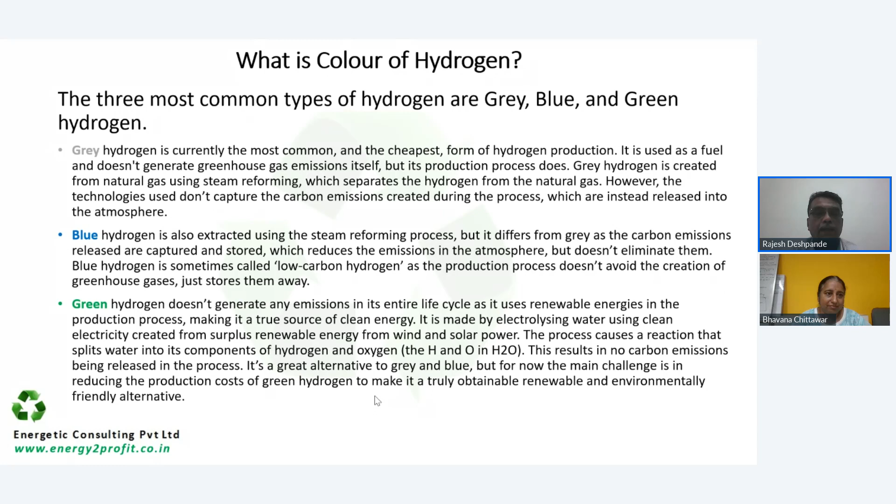Color coding has become necessary primarily because the use of hydrogen for various applications can be promoted only if it is coming out of a sustainable source. Otherwise, it makes no sense to have fossil fuel or electricity generated from fossil fuel and use hydrogen as a transportation fuel or any other source of fuel. So the first challenge was to make sure that the hydrogen coming out in the market is coming from a green source, which is a renewable energy source.

The other variants of color, as the technology is developing, these colors are getting developed. The last of the lot is white hydrogen, which comes out of a process called fracking. In the US, most natural gas is available from fracking, which comes from rocks underneath the ground. It's a kind of geothermal process which converts fossil fuels into hydrogen or a mix of other fuels. This is not very popular, but all the other sources of hydrogen with other colors are quite popular.

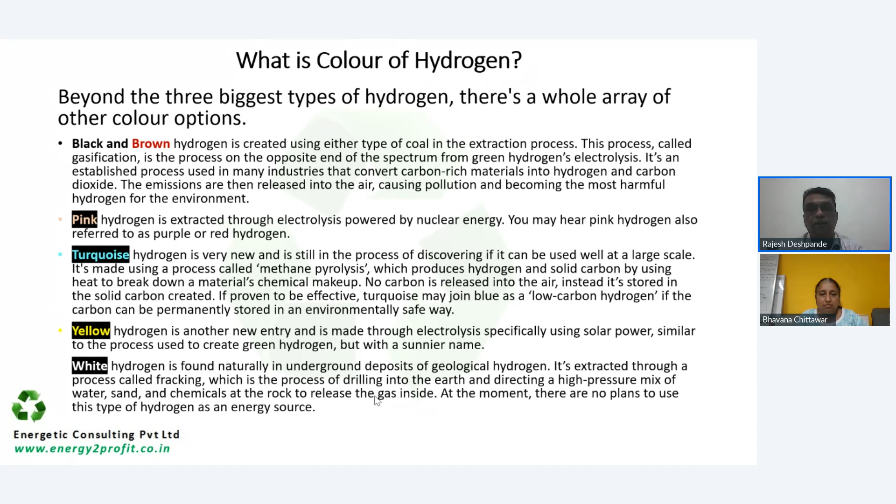Now, let's come to the Indian scenario of the green hydrogen definition under the National Green Hydrogen Mission. This is very latest, August 2023, this has been declared.

This understands that green hydrogen shall mean hydrogen produced using renewable energy, which is like the definition world over, including but not limited to production through electrolysis or conversion of biomass. Now, this is a very important part. This conversion of biomass is otherwise not recognized as a green source of hydrogen as of now in the rest of the world.

Now, in India we are recognizing it, and the renewable energy also now includes such energy generated from renewable sources which is stored, etc. This definition helps us to work on waste to produce green hydrogen.

I will show subsequently why this is a very significant and important step for the country as a whole, because as a country we have a dream to go for decentralized hydrogen generation. We don't want to have hydrogen generation at one place and continue to transport it all over the country. So with this decentralized hydrogen generation, we can now look at all sources including biogas, biomass, municipal waste, industrial waste, and convert them into hydrogen and further chemicals which can come out of hydrogen.

And they are getting color coded now. So for example, we now have green ammonia, which is a source for fertilizer making, coming out of green hydrogen, which comes from the process defined here. And for renewable energy, the hydrogen from waste, including wastewater through the microbial route etc., has to come out of a process with 2 kgs of carbon dioxide equivalent per kg of hydrogen GHG emission.

Now, this is a very good step the government has introduced, whereby we have started to define what exactly we want and how we want it to happen. We have a typical SOEC electrolyzer, that's a technology. Electricity coming from non-biogenic GHG emissions, lesser than 50 grams per electrical unit, needs to be used, but it is not restricting us to use these.

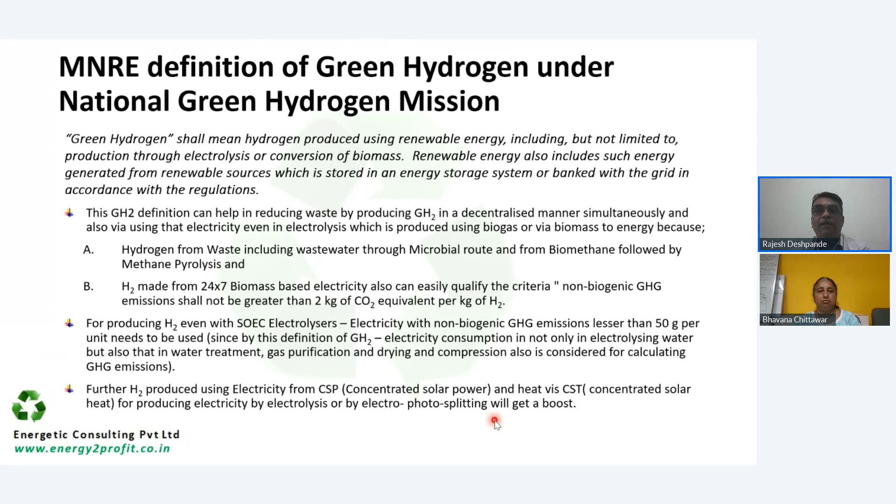Internationally, as I said earlier, the color of hydrogen coming out of biomass is yet not defined. It should include it, but it is not including it today. So, a reasonably proven technology of gasification, which is commercially available, is not possible to use to generate green hydrogen on an international scale. But within India, as I said, in this definition of MNRE, we have given a clear roadmap that we accept this as a green hydrogen source.

Now, without this introduction, the cost of hydrogen cannot be brought down in the capex and opex model. I will show this in the subsequent slides. So, the moment we go to this route of biomass, MSW, gasification route, then it can fulfill India's dream of decentralized hydrogen generation at the point of use.

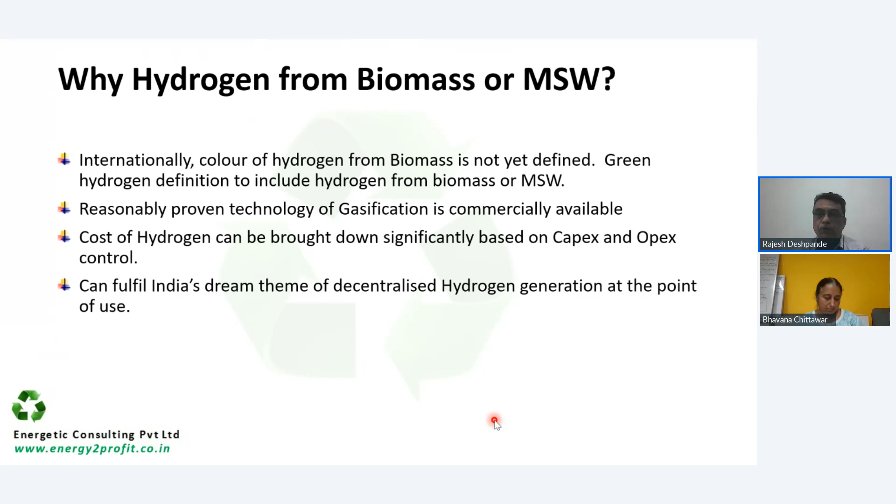When I'm talking about point of use, what are those touch points where hydrogen can be used as a fuel? One of the prominent and very direct uses is as light and heavy vehicle fuel. Hydrogen itself can be used as a fuel, and now we have hydrogen fuel driven cars available commercially.

Also, hydrogen can be converted to fuels like dimethyl ether, ethanol or methanol, which can be blended in current gasoline or petrol to generate hydrogen-rich gasoline, petrol, or diesel, which can substitute partially or fully the dependency on fossil fuel.

Fuel cells can become a future substitute to DG sets, particularly for cell towers like mobile cell towers, and at remote construction sites it is being immediately tried. Reliance Jio has done good work on this front, and they are moving ahead with a massive program on fuel cell to electricity for their cell sites. One day it can come to the kitchen and substitute LPG or PNG.

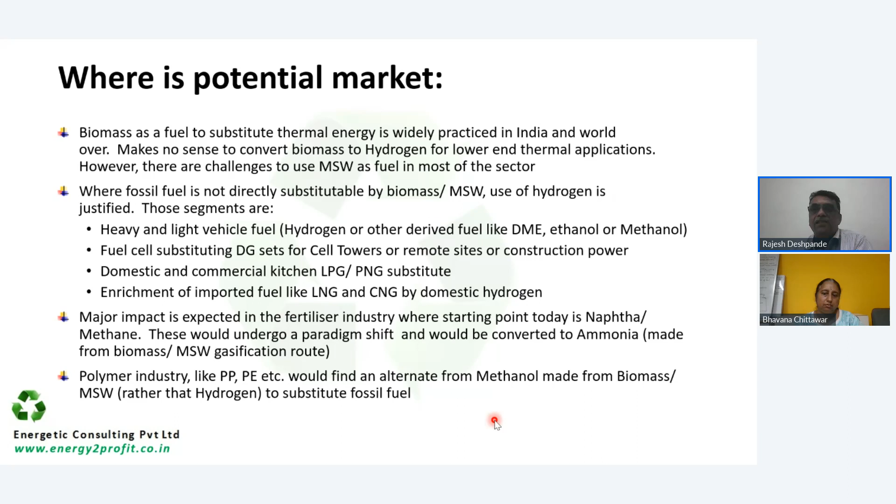It will gain enormous commercial value, and the idea the country is working with is that last mile profitability can be improved with these kinds of interventions. Of course, there are challenges, and there is nothing without a challenge. The biomass challenge is availability on a continuous basis as a bulk producer of chemical.

Biomass is a relatively cohesive composition. You have a very decently defined composition of biomass, so impurities can be finally treated and it can go easily to the final chemical product. When one wants to use it as a fuel, there are no challenges, because whatever you put in will burn or will come out as ash. But if you want to convert it into chemicals, then the chemical grade purity becomes a challenge.

Now, the cost of biomass is increasing very significantly, because its use is becoming rampant and significant. On the other hand, municipal solid waste is available in abundance. We don't know what to do with it. We have mountains of municipal solid waste all over the place, but it does not have a cohesive composition.

So you take mixed waste coming fresh from the homes and getting delivered to a site, you have a different composition than a legacy waste which is lying idle in a place or a premise for years. From a fresh municipal waste, one can get about 50% RDF, refuse derived fuel, whereas from a legacy waste that number is only 25% RDF. Which means that per 100 tons of treated fresh municipal waste, we can get about 50 tons of fuel, whereas per 100 tons of legacy waste, we can expect only 25 tons of fuel availability.

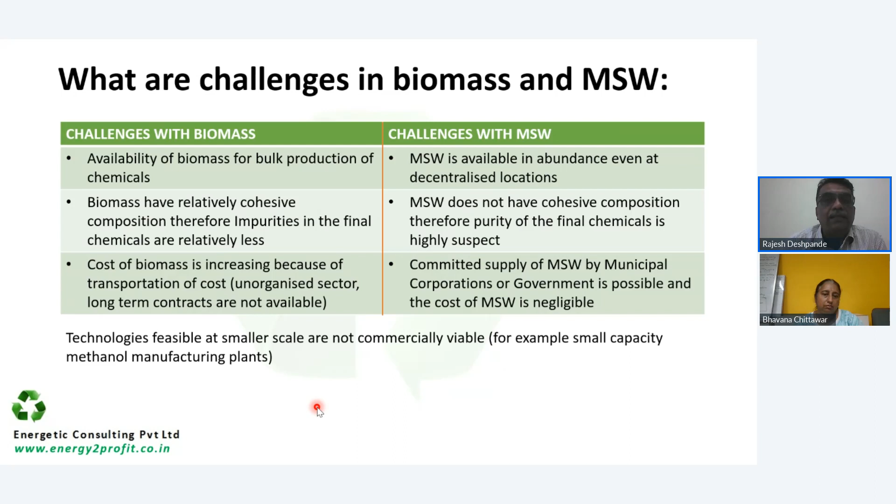Now, after having said the challenges, let's look at what is possible. Otherwise it would sound like mission impossible - it is not. The first step to get out of municipal solid waste is to get to syngas, synthesis gas, which is versatile and can be converted to electricity, chemicals, hydrogen, whatnot.

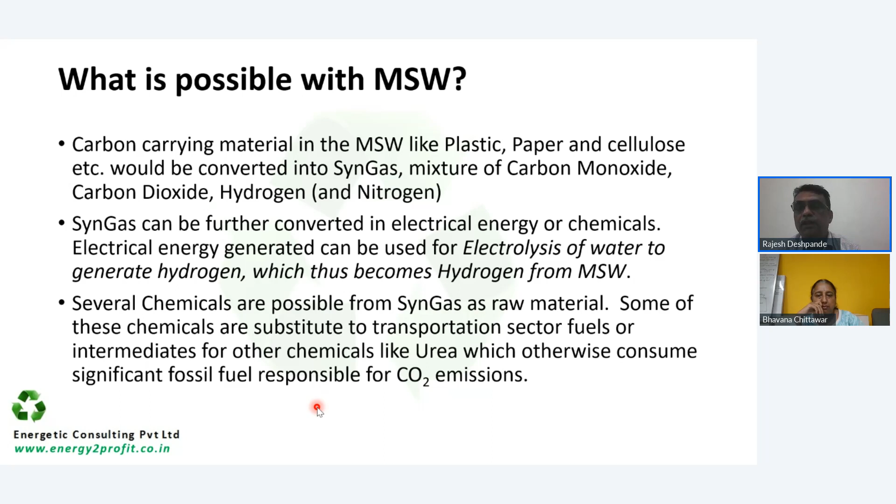I'm going to run through a small case study where we have physically installed a plant generating electricity from municipal waste, which is further used as a raw energy source for an electrolysis process to generate hydrogen. So this is the route by and large: 100 tons of municipal solid waste, through the syngas route via gasification, will give synthesis gas, which will generate power, which will generate hydrogen. So about 100 tons per day of waste can generate around 0.8 to 1 ton per day of hydrogen by the electrolysis route.

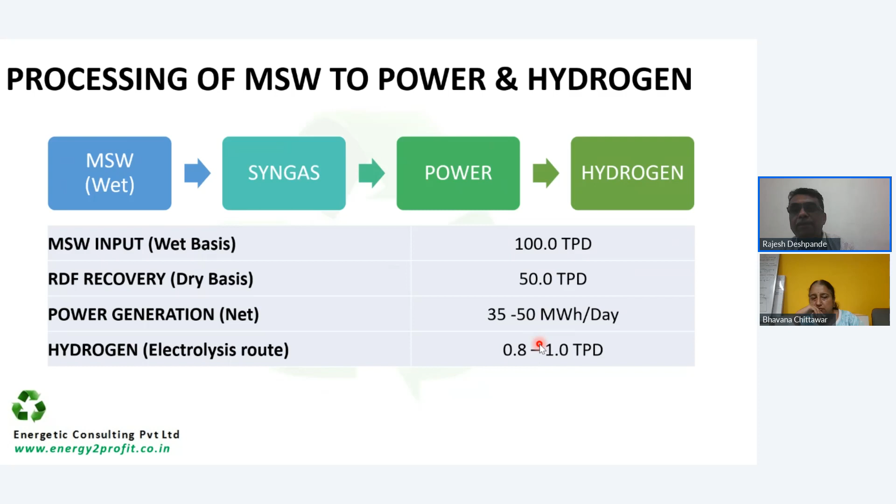Now why am I showing this slide? Because this is something which is working. This is the plant - what you can see at the bottom here was the concept model that was prepared, and what you can see here is the finally erected complete plant. This is in Noida, NTPC.

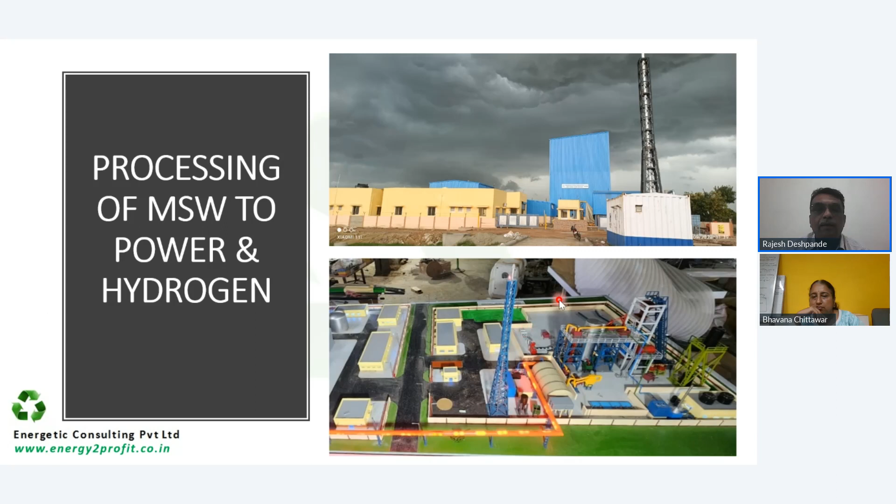This is inside the plant. So what we've done, we've got municipal solid waste coming in the form of briquettes. Those briquettes are transferred through this conveyor to the gasifier. This gasifier generates a gas which is synthesis gas, or syngas, popularly known. The other popular name for it is producer gas. This then goes into heat exchangers and cleaning mechanisms.

Post all this cleaning of the gas, this clean gas is stored in a balloon, and from the balloon it goes into the engine. This engine generates electricity. So this entire plant takes 15 tons per day of briquettes and generates 600 kilowatts of electrical energy.

Now, whatever I'm showing you here, I would definitely like to show you a live video of that.

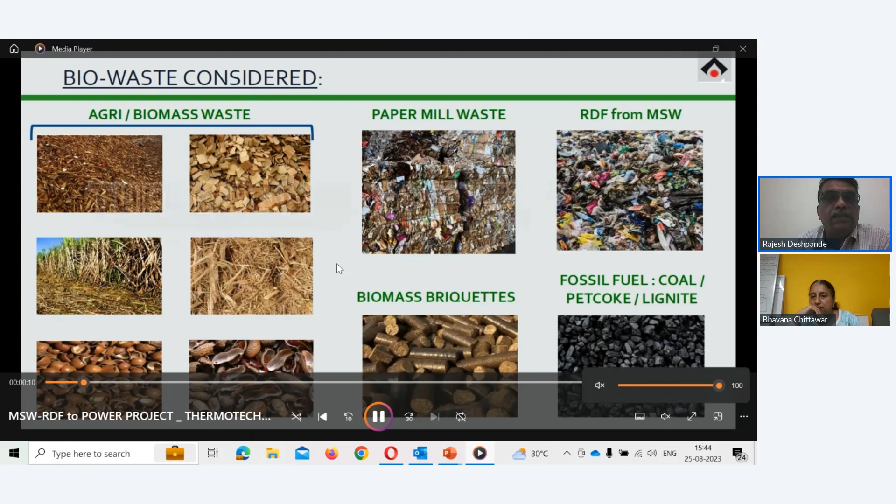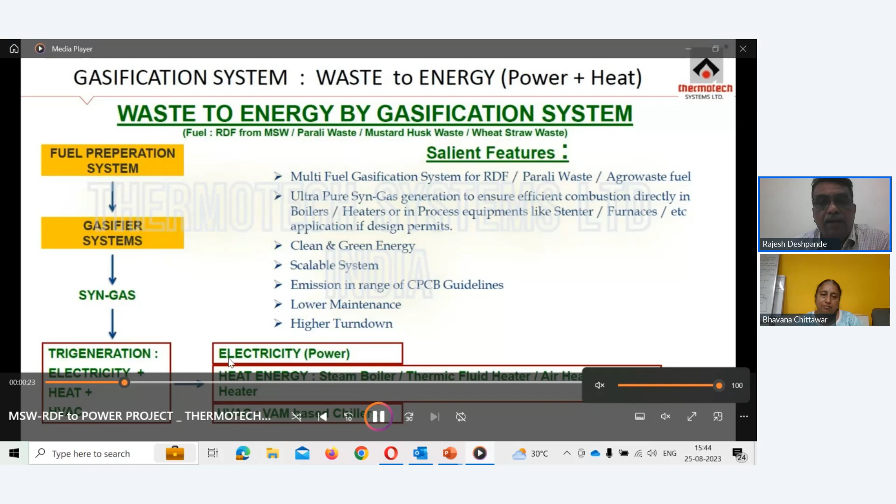Now this was done by a company, Thermotech Systems. We had done the entire engineering of this project from concept till commissioning. There is a fuel preparation system, there is a gasifier, syngas, then electricity generator. These are the briquettes what we aim to have, and these are actually the pile of briquettes what we have. So besides municipal waste, these kinds of fuels can be used.

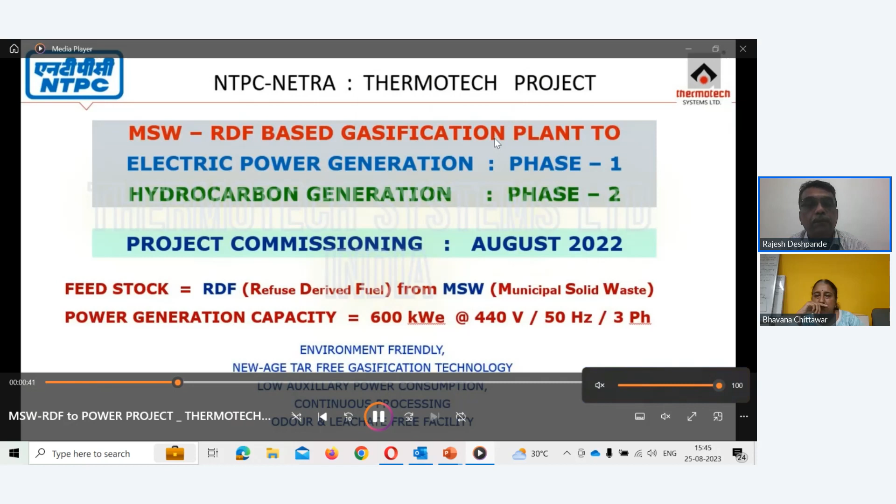So this was a project commissioned last year. As I said, what you see here at the blueprint stage is what we had conceived - these were all 3D drawings. Here what you can see is the route.

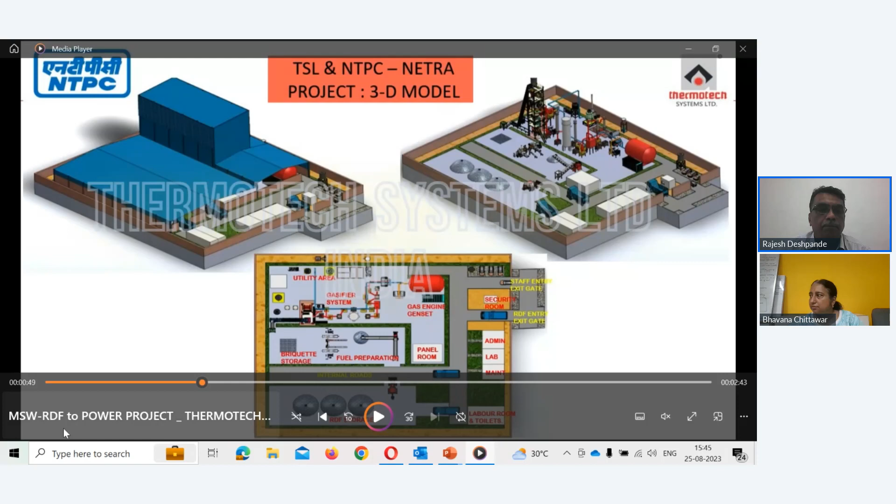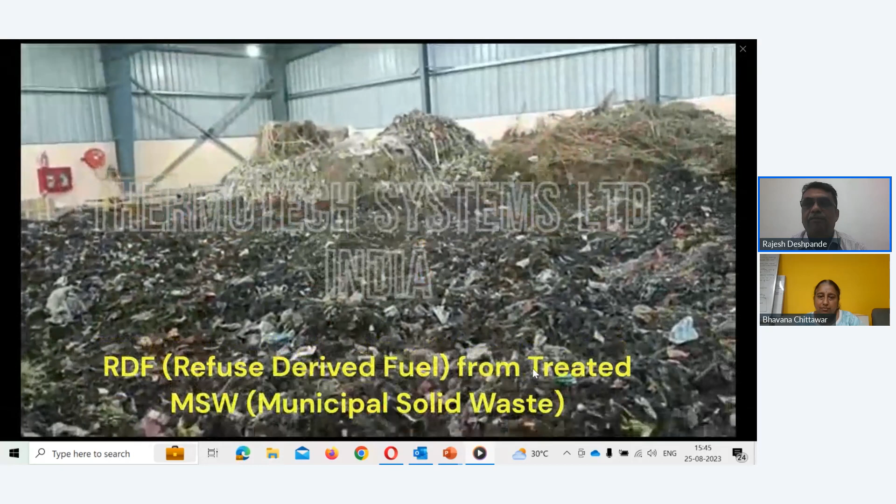Now this is actually the waste which is coming to our site. This is physically what we receive. I am very proud to say that all of it is converted finally into a very clean solution.

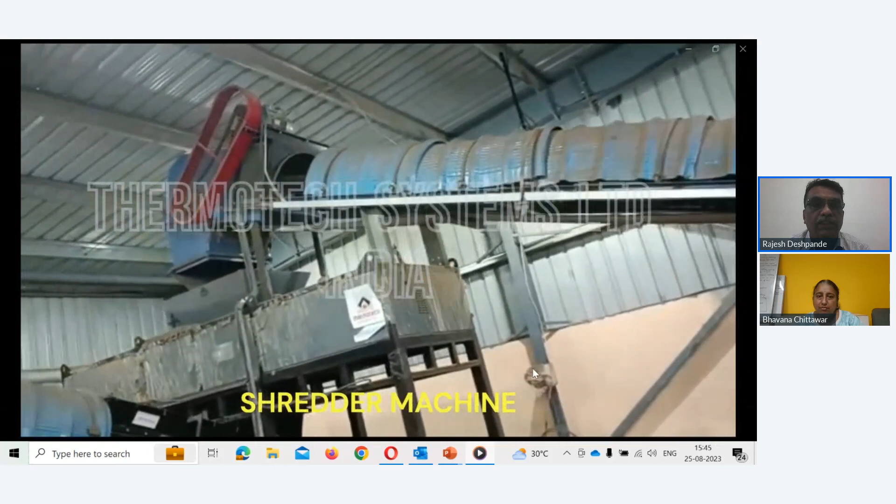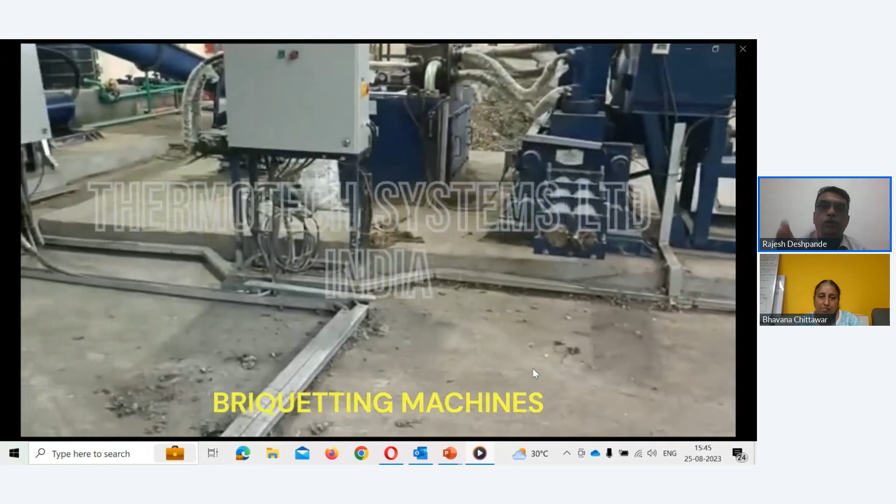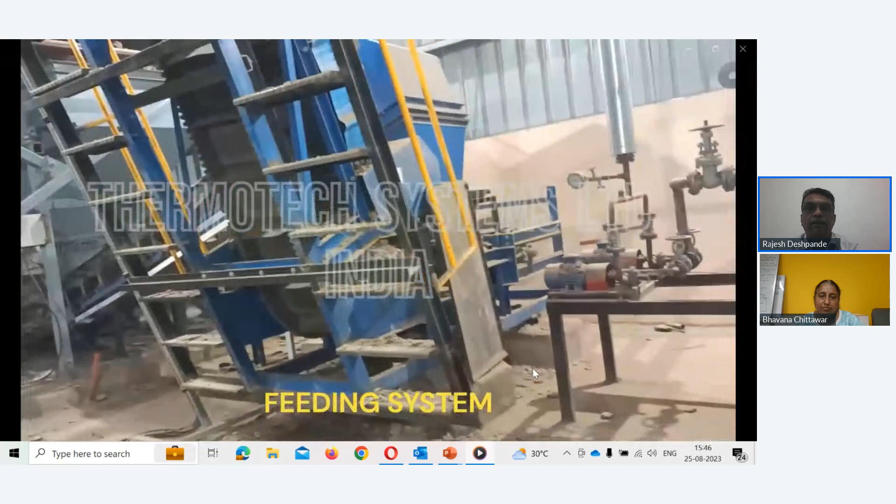Then it goes to shredding machines. From the shredded biomass, which you can see here, this is RDF. It has got plastic, paper, everything you can see in waste, which goes to a briquetting machine. So there are briquetting machines which convert this pile into a briquette. Now what you see is a briquette made out of municipal waste, which is then conveyed to the top of the gasifier through the conveyor, which is a feeding system.

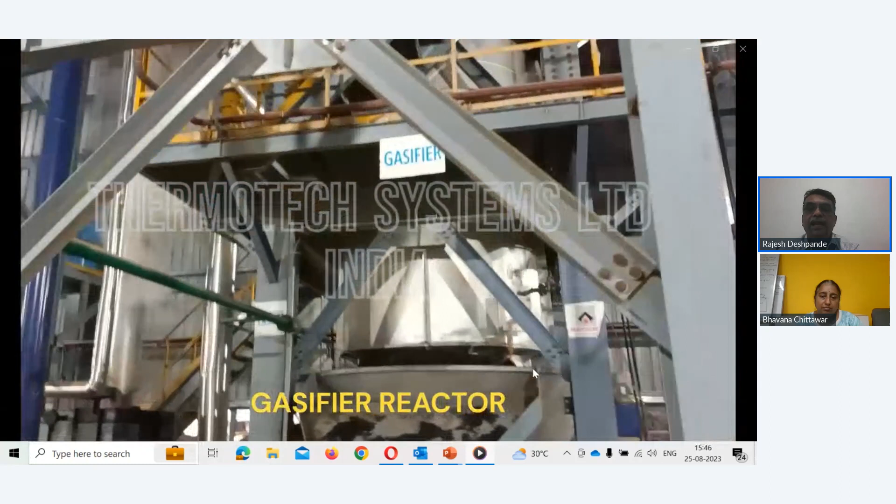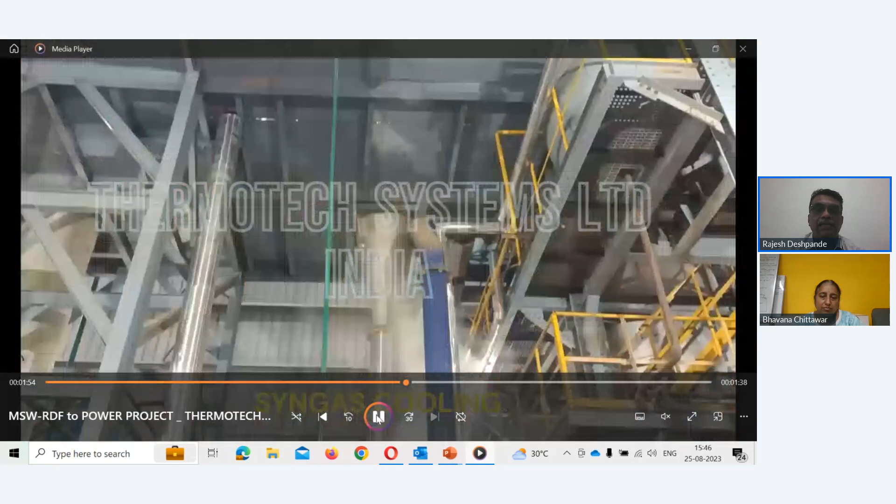It's a tall 18-meter high structure. Now this is the gasifier, which is the reactor. In this reactor, the whole waste briquettes are converted into finally a combustible gas, which is taken to this heat exchanger.

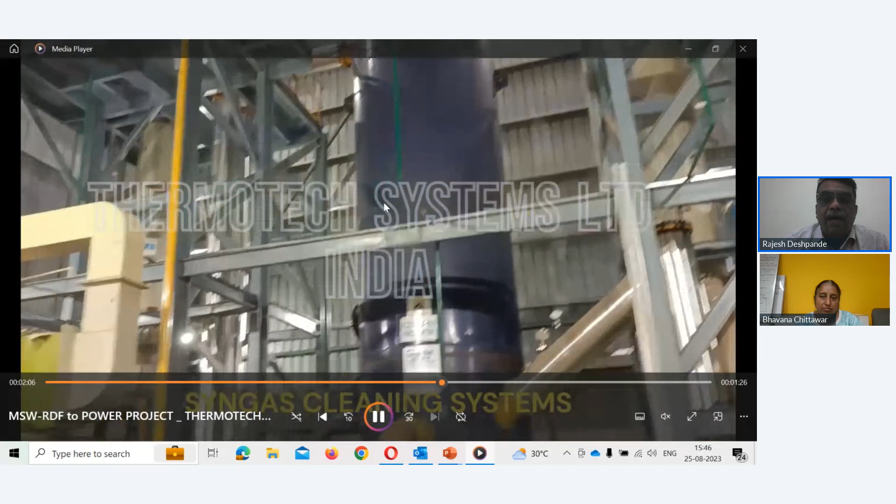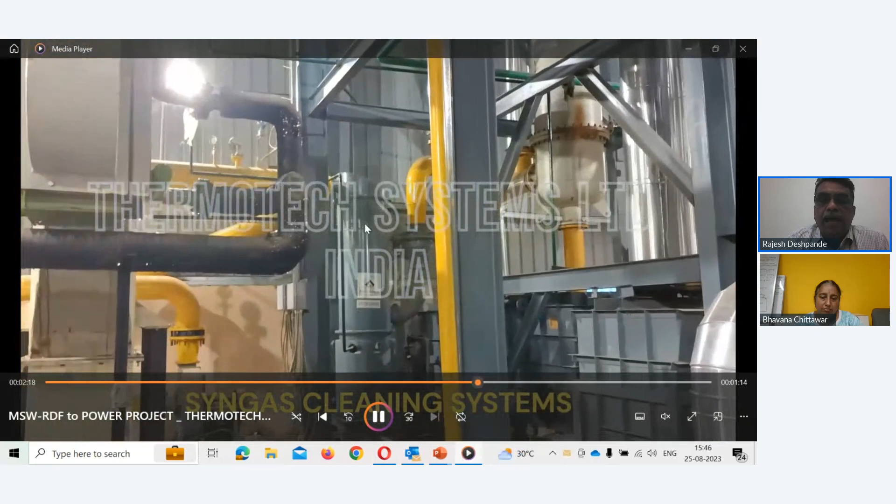And the other cleaning, this is the cleaning device for gas. Any tar, fine particles are removed. This is the terminal cleaning of the gas. This is a final dehumidifier processor. Then the gas is completely cleaned of any impurity.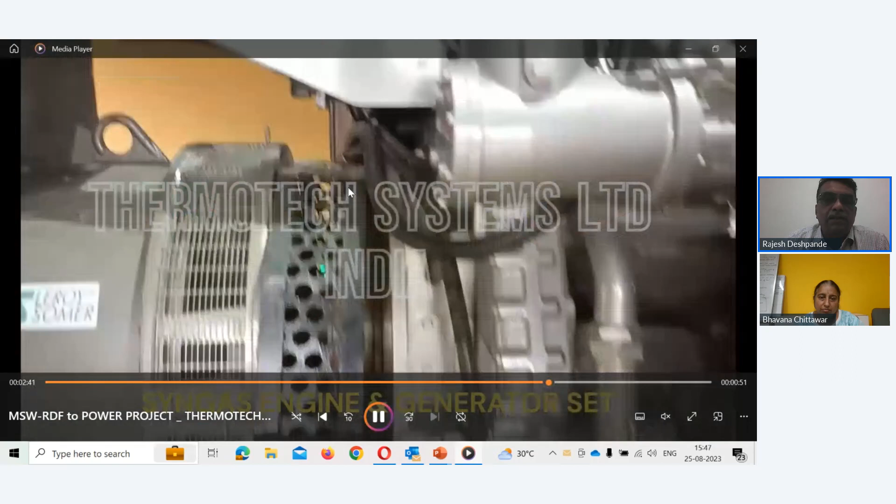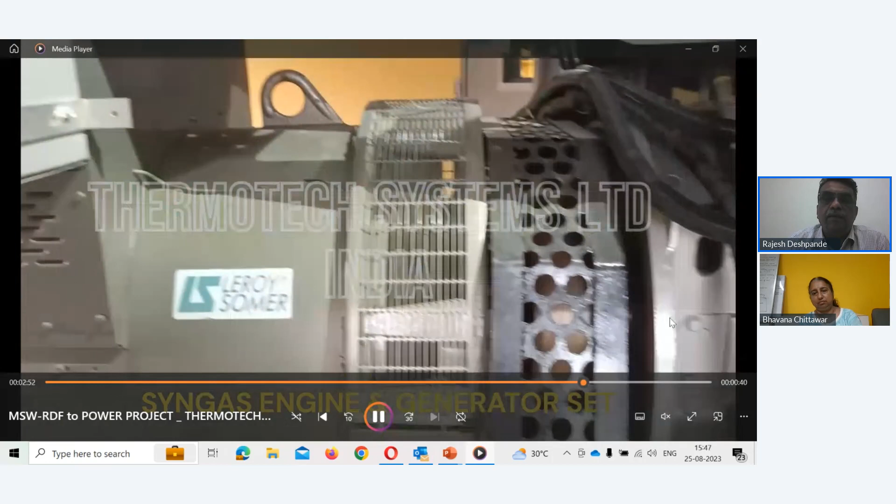So you can see it's a very established supply chain. It's not a run-of-the-mill kind of supply chain. It's properly engineered, a completely well-designed system. This is the engine, a 700 kilowatt engine derated to 600 kilowatt power generation.

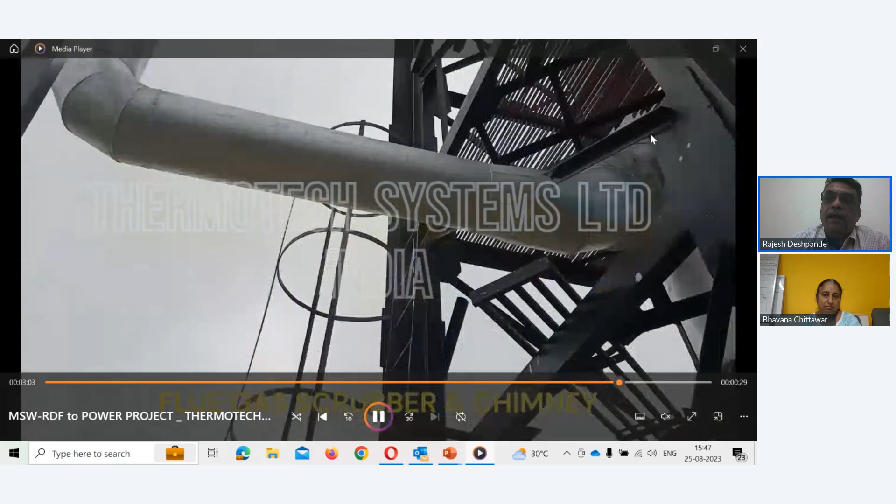Then we have a final flue gas scrubbing. Then it goes to the chimney, and from the chimney it goes out to atmosphere. What goes to atmosphere is completely clear carbon dioxide. We have a continuous monitoring system of NOx, SOx, chlorides, and hydrocarbons. Everything is as clean as a DG set exhaust, what you can see in your back cabin. It is as simple as that.

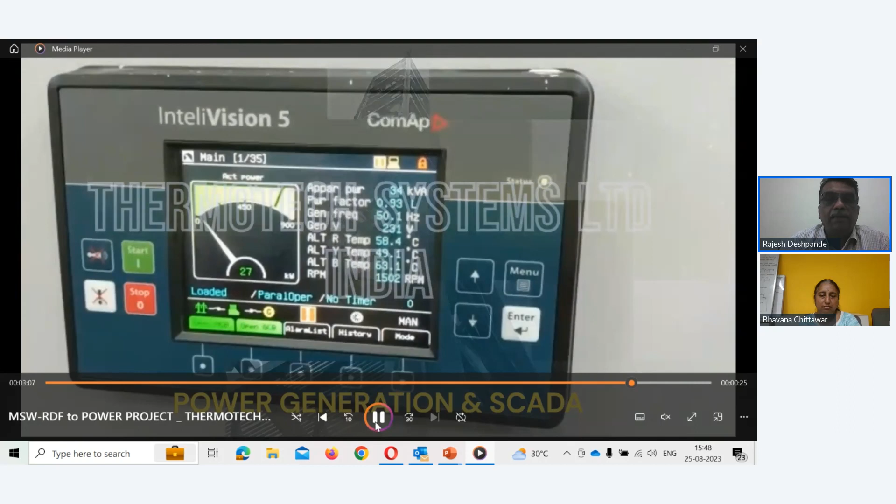These are the power synchronizing panels. This is the power generation module. So this is completely PLC based power generation. On a SCADA, it is integrated.

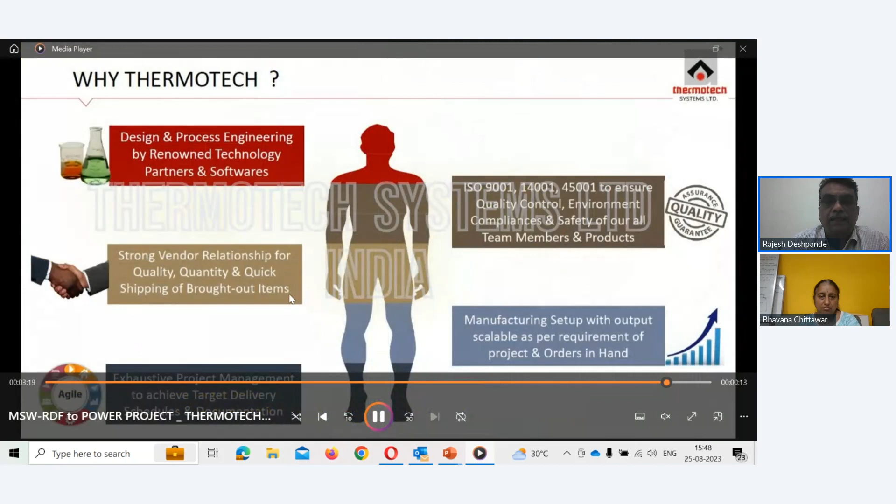Now, Thermotech as a company has been providing this, and we have been working on the entire chain of engineering. So, as I was trying to show, coming back to the presentation again, what you saw here was the complete chain from the briquettes to the power generation. I think the video would have made it very clear for somebody.

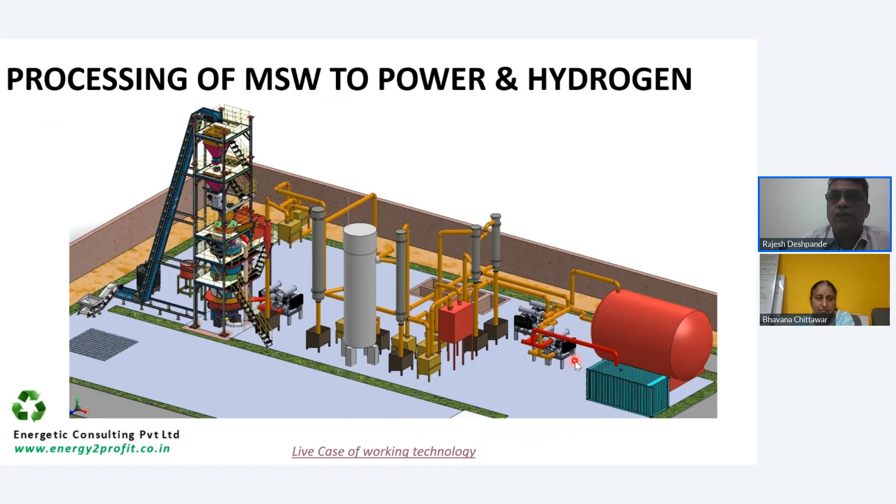Now, processing of MSW, that is municipal solid waste, to hydrogen and chemicals. So the 100 tons of municipal waste, if you remember, was giving me 1 ton of hydrogen by the electrolysis route. If I go by a chemical gasification route, I can expect the generation to be 2 tons, double of what is possible out of electrolysis. Now that is why biomass conversion to hydrogen, or MSW conversion to hydrogen directly, makes a huge sense. You get double the amount of hydrogen for half the amount of power.

Because your electrolysis consumes about 50 kilowatts of power per kg of hydrogen, and the gas separation process consumes less than 20 kilowatts of power. In fact, we're working on a model where per kg it can be brought down to less than 10, which means the overall energy impact in terms of consumption per generation is very, very optimal now.

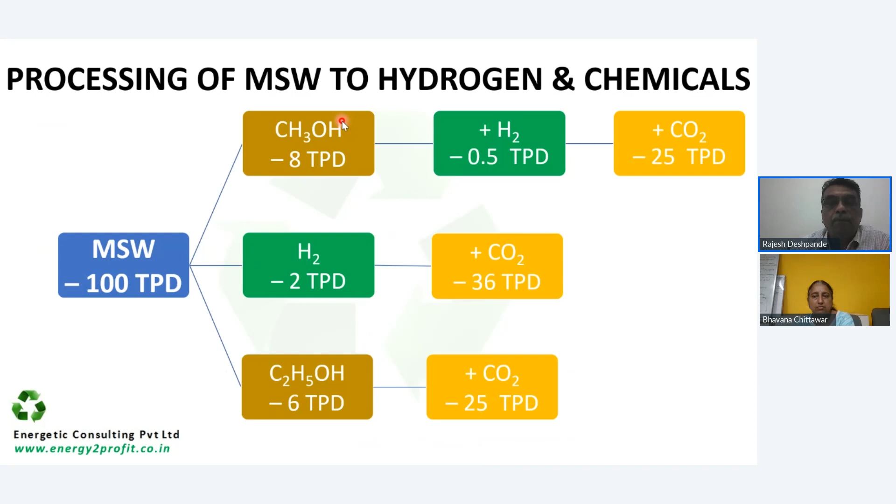Just to come back and summarize, the synthesis gas we were talking about, this is the green product produced. Via hydrogen, it can give ammonia, chemical, or it can run a fuel cell. The same synthesis gas can be used for power generation. Reliance has a pet coke to power mission, and they have a plant running completely on this. The refinery is completely running on synthesis gas to power generation route under the J3. It can convert to methanol, and it can give ethylene to polyethylene, acetic acid, formaldehyde, dimethyl ether, methyl acetate, polyolefins, petrol.

Then we have the process of Fischer-Tropsch. If we can take this synthesis gas through this route, we can get naphtha, petrol, diesel, wax. This gas going to synthetic natural gas is possible. For iron reduction, iron ore to iron, this gas is very useful.

Now, whatever I am telling you today may sound like some fairy tale, but believe me, the world history would have been different if the Germans would have been the winner of World War II, because they had nearly conquered all of this. This was the route the Germans were working on, with coal as a basic fuel and everything else. They had automobiles working on this syngas already.

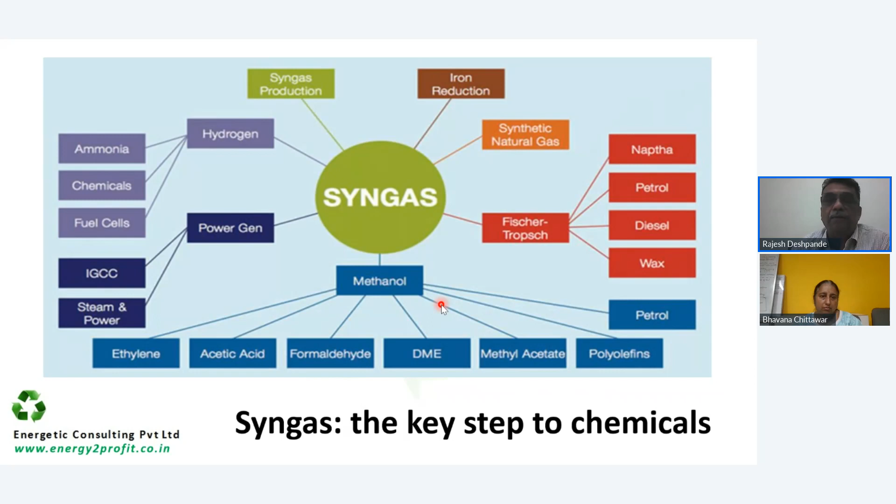So in conclusion, I would just like to say that it's no longer just an academic thought. It's a very well engineered solution. There are projects already under execution. Technology maturity level, TML, or technology readiness level, TRL, for municipal solid waste or biomass to hydrogen is close to 100%. In fact, IISc Bangalore has already got patents for biomass to hydrogen from certain starting biomass, and it can be commercially available for any venture.

So people were really serious about business in this line. This is no longer a fairy tale. Now, the approach we had to this problem was two-pronged. We wanted to address two issues: sustainability through pollution reduction of municipal solid waste, and the land blocked by municipal solid waste should be free. The pollution above ground is known, but the pollution subground can be eliminated.

We have got millions of tons of legacy waste lying all over the country and the rest of the world, so we've been getting inquiries from the rest of the world. We are working on projects beyond India, including a project in Canada where they have a lot of agricultural waste, which we will be converting into chemicals, biofertilizers, and biopesticides. Again, it is not a fairy tale. This is something we are going to dispatch in the next couple of months.

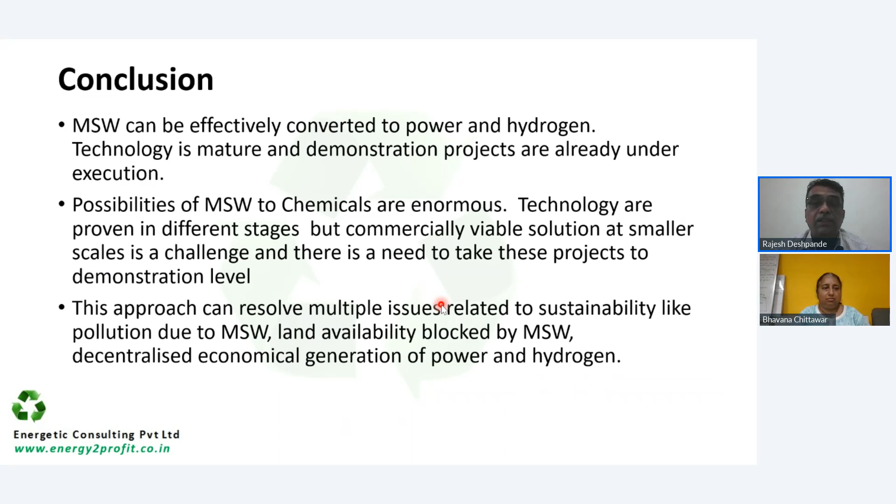So my point here is that we are going beyond theory now. And to all the audience here, I would like you all to believe that the transition and the revolution has begun, and we can expect to see results. Anyone interested can reach out to me, my company, Bhavana, or AEEWI. We will be glad to provide all possible inputs and see to it that this doesn't remain a paper talk, but becomes a mission by itself.